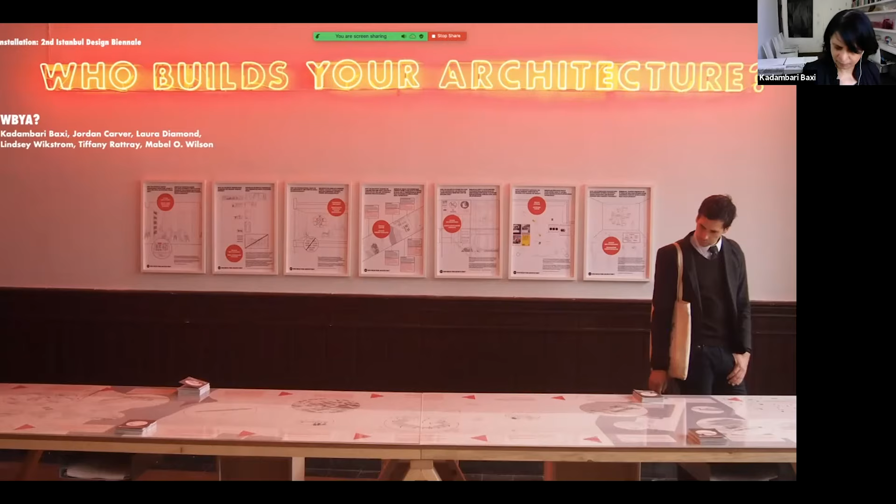The core members of the group are listed here. Our collective has also benefited from contributions from many others, including colleagues, students, and collaborators in architecture, academia, construction, and human rights. And I see in the participants we also have some of our key collaborators, Peggy Deamer, Paolo Tombesi, so hello. And I also see an alum in the audience, so I want to say hello as well, and thank you for being here.

So as Pierre requested, I'm here to share brief excerpts of WBYA's work, but also to share our working methodologies. I hope, as I said earlier, this can lead to a general discussion around activism and agency in our field at large, and particularly at this moment. To that end, I'll note certain tactical approaches in the group's work.

The first is simply to insert this question, who builds your architecture, again and again, as we've seen throughout today and in the various presentations. So it has been really, really thrilling to be here and to see this question being repeated in this context.

We wanted to frame this question in a way that supposes a distinction that can be rendered visible. That architecture is essentially a collaborative process, cannot be an afterthought, just as Christine mentioned just a few minutes before. Not only can this question not be taken for granted, but what if it does not appear towards the end, but is at the beginning of any process of building, and in their histories as well as their futures? With this in mind, our group chose to name itself in the form of a question. For us, this one question sparks inquiries into many aspects of the discipline, from ethics to practice to education to technology.

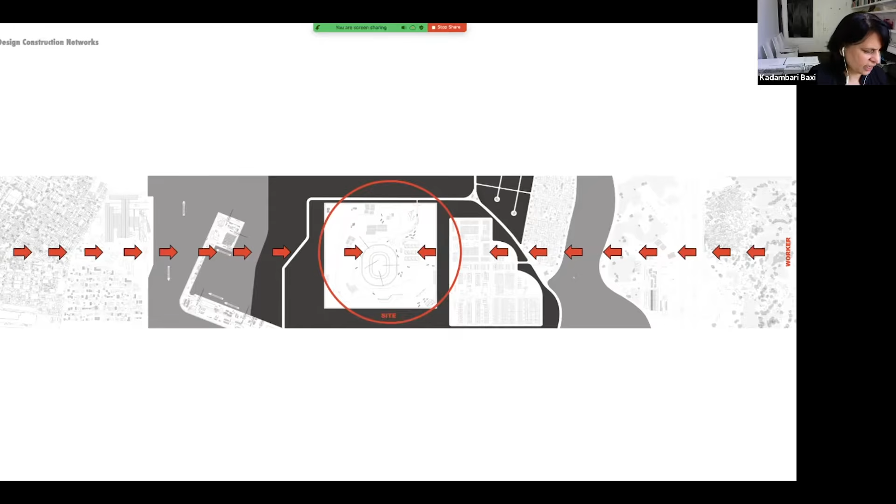Overlapped are more detailed views of spaces and sites through which move documents, materials, and workers. This drawing imposes a forced symmetry on processes and conditions that are often highly unequal, but remain linked, if not interdependent.

So this slide shows the detail of a steel truss as it moves from an architect's office to an engineer's office, to its fabrication and shipping, to its ultimate arrival on a building site. And of course, these are all dispersed sites across the globe.

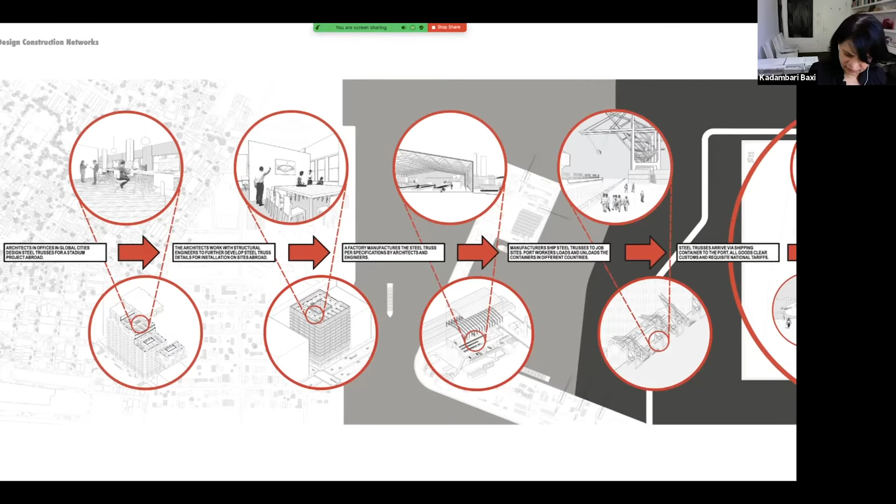The other side charts the path of a migrant construction worker as they travel from villages to urban training centers, to airports, to labor camps, to the same building sites.

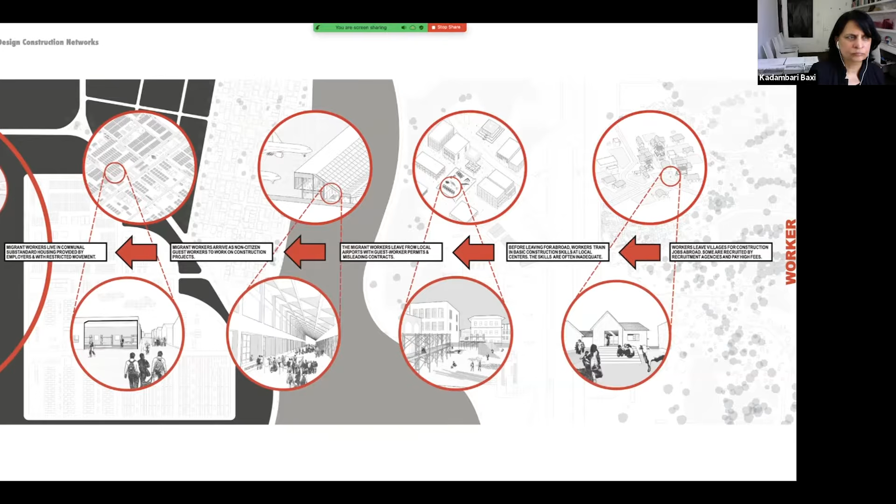From both sides, architects, steel trusses, and migrant workers arrive at a common site. Overlapping aerial site maps, views move from axos to perspectives to reveal details of spaces of production, migration, and some of the actors involved.

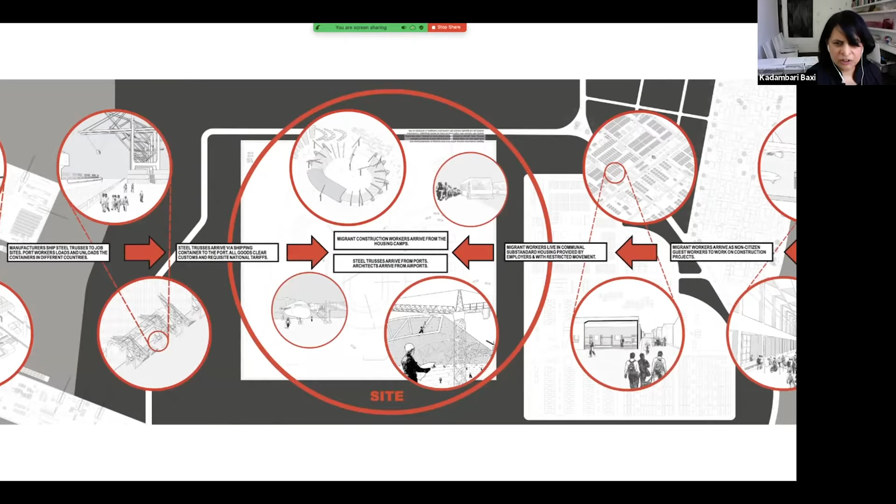And this is probably not a surprise to anyone in this symposium, but the left side of the network today, with its highly developed management systems and software, tends to run fairly efficiently most of the time. Minute changes and coordination across this vast network across the globe is easy.

For example, a change in the location of a bolt in the truss can be made fairly easily across the system from design to implementation.

However, on the right side, difficulties faced by migrant workers at various points remain highly localized. To some participants in the same network, they also remain largely invisible, or as was just pointed out in the previous question, it's considered not related to their professional work.

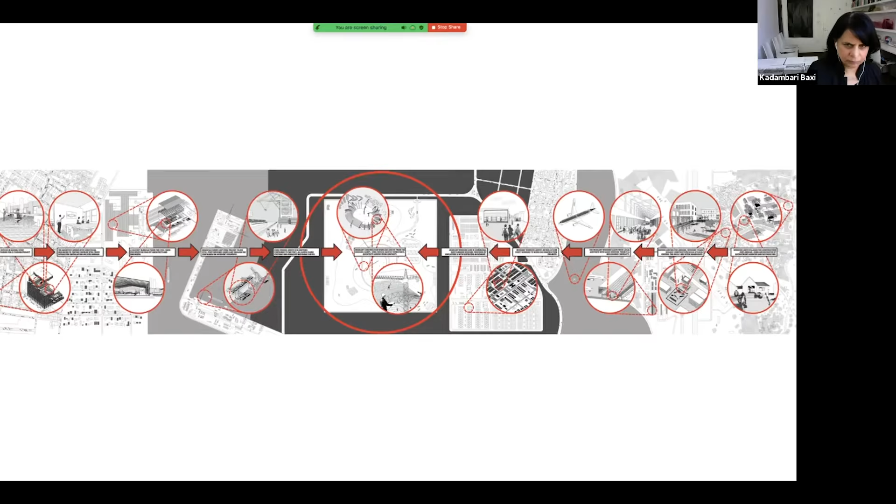These drawings source information from reports by human rights organizations. They report extensively on the exploitative labor conditions, especially in the Middle East. Some have called these conditions modern-day slaveries. Others have used the definition of forced labor or unfree labor.

And I think this is a discussion. How is labor, this type of labor, defined? The United Nations takes certain positions with it.

But I think as architects, we also need to think about the different definitions of labor or workers that we use or talk about. From poor housing as labor camps to substandard wages, to unfair recruiting conditions, to guest workers with no access to citizens' rights, they document the dark side of architectural sites.

For a quick summary, I'm going to play this video by Bill Van Esveld from Human Rights Watch. This was really our first panel going back to 2012. But I think it was really critical to revisit this today, because this describes conditions, perhaps you might say, at the height of neoliberal economy and a kind of hyper-globalization of architectural sites.

I think post-pandemic, we have enormous challenges to face in this context. So I thought it was important to just see what the conditions were then and what might be expected as we move forward.

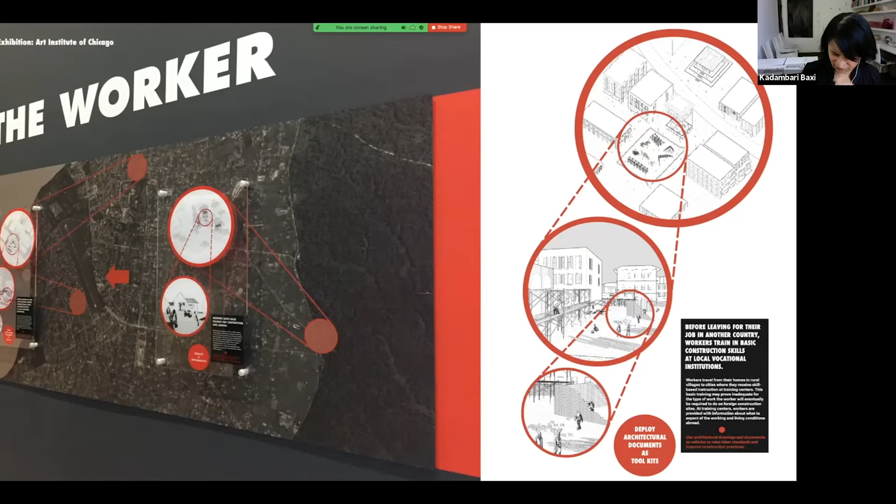For example, here, the red dot at the bottom says: deploy architecture documents as toolkits. This is where workers are getting trained before they even arrive at the construction site. This was one idea that came out in some of our workshops and panels.

I'll quickly go through some of the others that came up. These descriptions are written for a general audience so they can understand this entire network, including ideas about how to improve basic standards for workers' housing, etc. These are quick ideas that can be worked on further, but even with our small workshops, we felt we could come up with ideas quickly in terms of how these kinds of issues can be addressed.

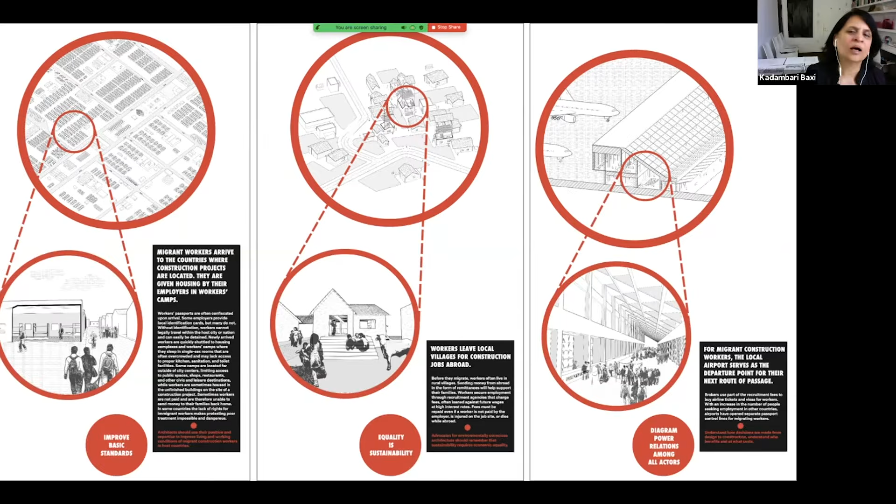Expanding the architecture code of ethics I just talked about, there's this idea of whether consultants like human rights experts can become part of larger architectural teams, especially when architects work on transnational projects. Some of the proposals include employing human rights experts on design teams, and giving credit to all workers in the entire process from design to building.

These are just some last few images. I wanted to end with a quick look at a workshop we did in Istanbul, which we found quite inspiring in our work. This was a workshop at Studio X Istanbul, GSAPP Studio X, and the participants included young architects, members of construction unions, and lawyers working with them.

They narrated to us a pretty complex case of a fire on a job site and the various actors involved. What was really interesting was looking at the different definitions of workers, whether they're able to unionize or not, how much they're paid, etc., emerging as a network that can be drawn, with critical information placed precisely to see where changes could be made, or should be made, or lobbied for—and what kind of agency architects would have in influencing this discussion.

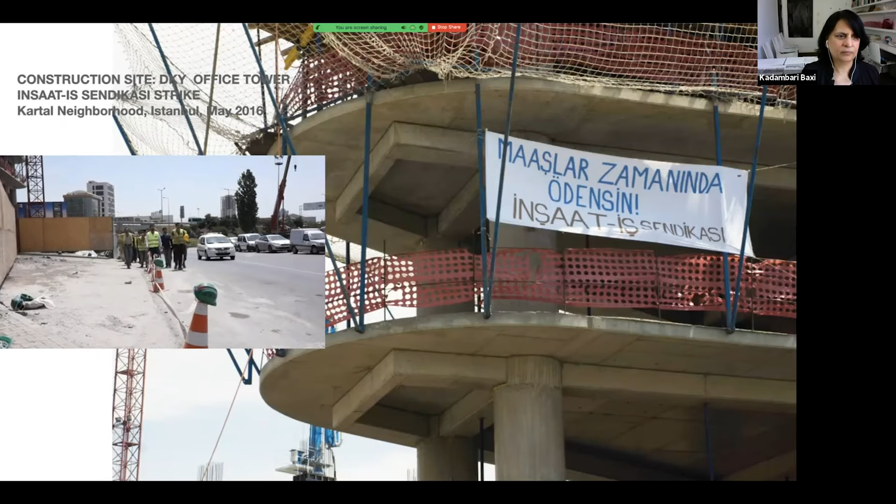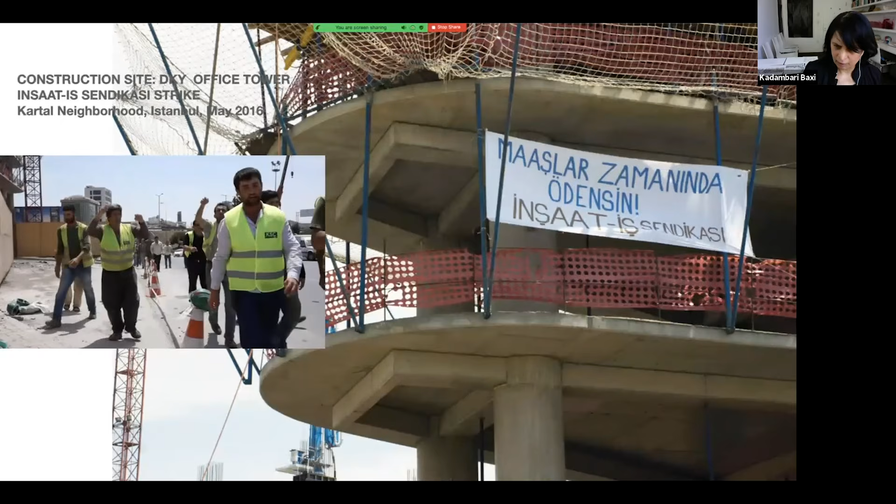And it's through that they also participate in many strikes, or at least are present. While we were there we visited many sites, and this was one strike on a project where workers hadn't been paid for a month. Finally they decided to just walk out and make their conditions visible, but also quite audible. It's really interesting that these young architects not only follow these sites and document them, but also join or are present at some of these strikes.

Today it's also very complex because of the status of many different kinds of workers who are either part of or not part of the workforce, particularly the tensions between some immigrant groups and undocumented workers on construction sites. This is again part of a discussion—these issues came up in almost every other presentation in this panel, on projects that are historical. I think we really need to produce a discourse now that starts understanding these very complex issues, but also tries to make them visible in different forums and practices.